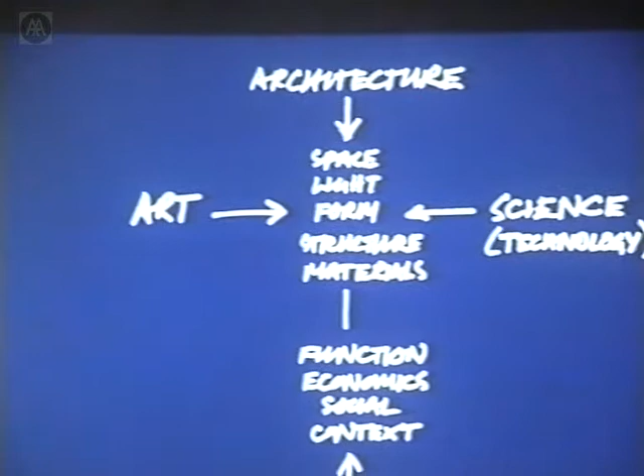Whilst the 20th century saw the start of the modern movement and the rapid development of technology, spectacular failures marred people's confidence in modernism. There was the destruction of our town centres for road improvement schemes. There were social problems caused by the housing programme, and there was general mistrust of architects and planners, which wasn't helped by the proliferation of badly designed buildings just after the war. And it made it much harder for later generations to do anything new.

But now attitudes have changed towards innovation and advanced technology, and there's a newfound confidence in design. At the same time, the boundaries between art and science have been blurred. Many artists have moved from the confines of traditional materials to new technology, and conceptual art has long since lost the need for an object. Science museums are now using artists to convey scientific principles.

New developments in material science and nanotechnology are coming into range, which will allow us to manipulate the structure of building materials to suit our needs. Computer programs are becoming ever more sophisticated and easier to use, so designers now have access to complex geometries which were previously beyond all but the serious mathematician. At the same time, engineers have 3D stress analysis programs which make it easy to determine the structural possibilities and therefore make complex buildings much easier to produce.

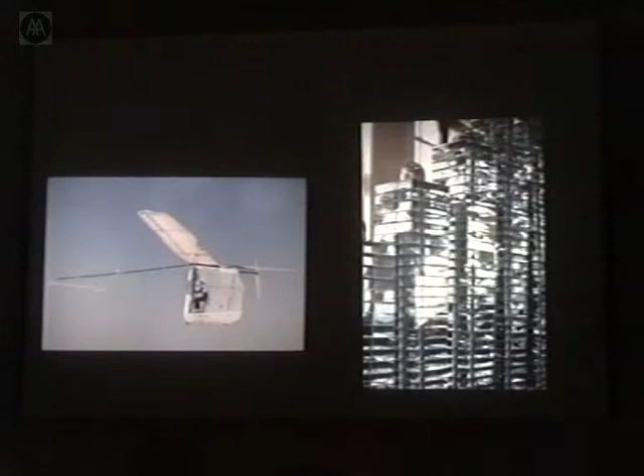Bryn came with the Gossamer Albatross and a sculpture by Danny Lane in glass. And we had this dialogue about using very fine cables and glass to try and move the technology forward, to try and make it as challenging as we can.

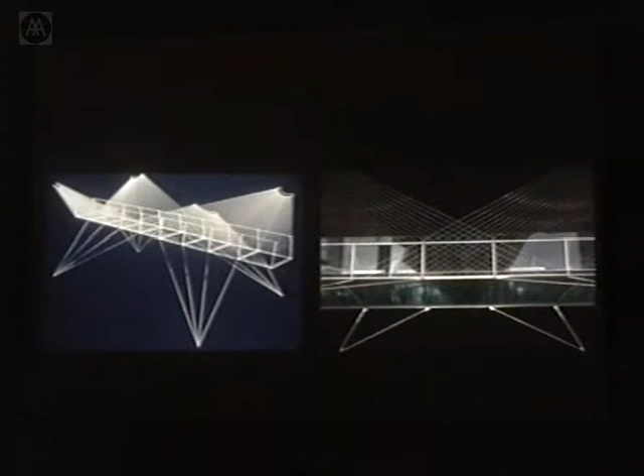This was the first sort of computer drawing of the scheme on the left. It's hopelessly out of scale. In fact, the cables are only 1.5 millimeters, about the size of a double bass guitar string. You can see on the slide on the right, that's the finished bridge. You can only see the cables because there's a black curtain down.

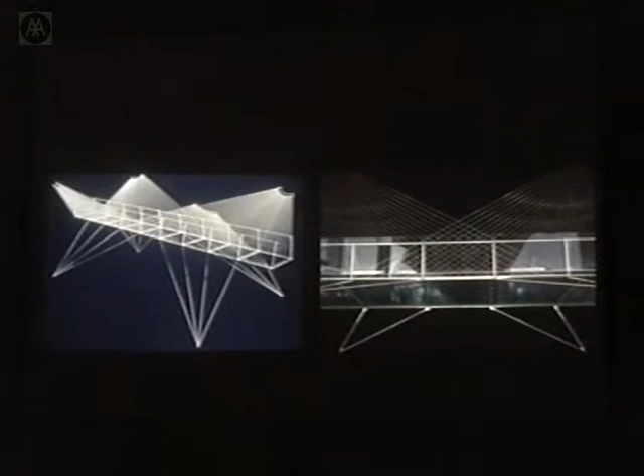This was on the day it opened, and they provided a black curtain which they unveiled, and we were able to get a photographer in to photograph it because the rest of the time the cables are invisible. And that was what we tried to achieve. We wanted it to be light, and we wanted to show that technology has moved forward.

The principle of this bridge is quite simple. We've used glass on its edge, and you walk on the top edge of the glass. So you've got planks of glass which are 20 mil thick, 100 mil high, and it's 1.8 meters wide. And it's used in a very similar way to the Danny Lane sculptures. You get this very interesting sort of chunkiness of the glass on the side. In fact, the weight of the glass helps the structure. It provides a download which helps the tension structure from movement.

The cables, you can see, are very, very fine. They're attached to this stainless steel member at the top, which has a kind of piano key to tension them up. And that in turn is connected to the main structure via stress gauges, which are connected up to computers. And each cable is in fact attached to the computer as well.

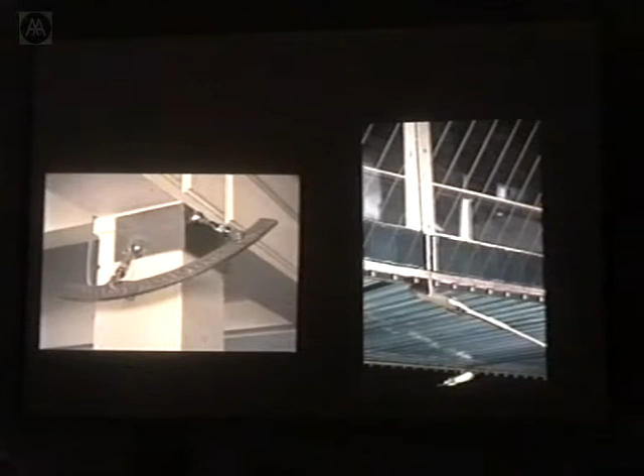These cables go from this steel crescent shape down, wrap round a little peg underneath the 25 mil channel underneath the glass, then underneath the deck and up the other side. So it's like a sort of tensegrity web in a way. And I'm not absolutely sure what the difference between tension and tensegrity is, but for me this is a tensegrity structure in the way that Buckminster Fuller talks about tensegrity structures.

You can see we've got bigger cables holding it down, and you can see people walking over the bridge, although it is a bit scary at first.

Now, on each project there are various aspects which we're interested in looking at. It's not always just the basic sort of structural elements, it's not pure architecture, it's all sorts of things. And in this instance, we explored the possibility of making it active rather than static. It seems to me that structures, and buildings for that matter, don't need to be just static. They can have more life to them.

And in this instance, we worked with the artist Ron Geesin, who wired the whole thing up. He put sensors underneath the glass deck. He connected all the cables up, as I mentioned, and he's got the stress gauge as well, and he's got video cameras on either side.

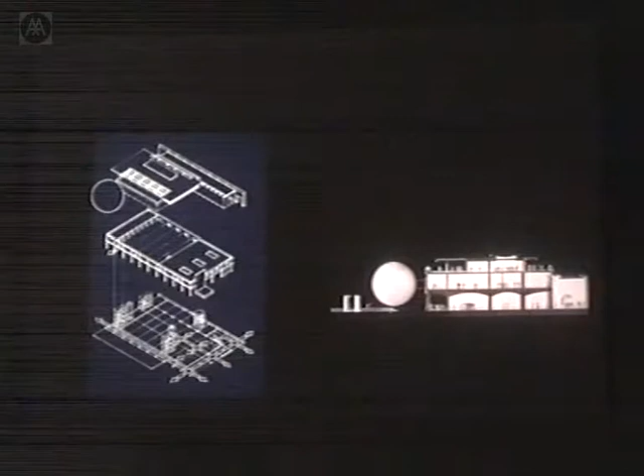On the ground floor, we've set the glazing back so that there's an arcade on three sides of the building. It gives it a little bit more depth, a bit of light and shade. And then on the top, the new deck is that concrete element. Let's see if this works. Here, which returns up to provide the balustrade, and that's the roof of the new floor above. This is the planetarium under construction, which is a steel structure.

The idea was that we would try to incorporate some intelligent glass systems, and to have multiple light sources with a sophisticated control system, so that you could play the building. It's important that the ground floor of the building and the pavement on the outside are exactly the same level.

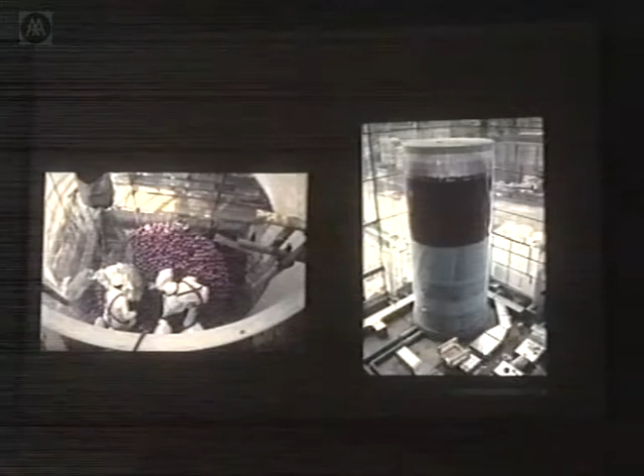In this building, we're working with Overton Partners. Greg Chickaha is the M&E consultant, and we set him a task. We needed cooling because it's a deep plan building, and there's a lot of technology inside. It's going to get heat spots, so it needed cooling, but we didn't want to have any toxic refrigerant.

He came up with a virtually untried idea of using eutectic salts, and these are the eutectic salts. They're housed in 100mm spheres, and there's a colour to the plastic that houses them. Now, the point about eutectic salts, and I'm not a great scientist myself, but apparently it changes state at 27 degrees centigrade, and it needs very little energy to give it this change of state.

So there is a latent heat, a latent energy which comes from the changing of state, and we use that latent heat as our power source. The medium is water, so these balls are all housed, we call them Greg's balls. They're all housed in a glass tank in the main gallery, in a vat of water, and that water is circulated to heat pumps throughout the building, which change it to hot or cold as required according to the temperature requirements of the day.

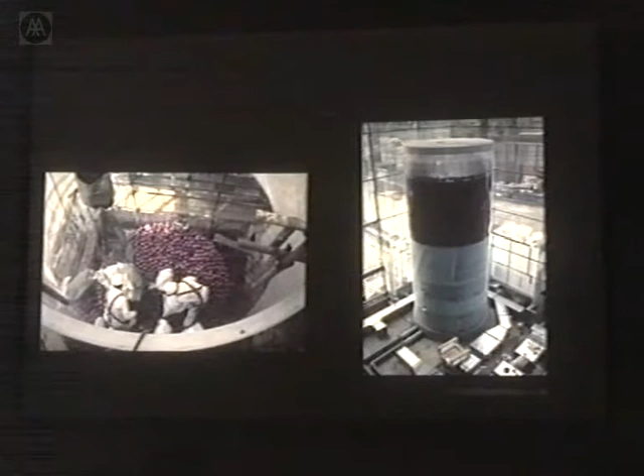We've also added thermochromic colouring to the balls, so that as they change temperature, they change colour, and you can see what's happening. It's kind of interesting, and it's working. But I have to admit, at the moment we've got a slight problem, because the water's actually sort of going a bit of a green colour, and we're having some teething problems on it. But it's certainly worth looking at new ways of solving old problems.

I should say that it isn't just the eutectics that deal with it. We also have a displacement ventilation system, for those who know what that is, using thermal wheels on the roof. So we're always using recycled power. And I also should say that when we need extra power in that tank, which is our boiler, we can top it up with off-peak electricity at night.

On the top floor, we have these big open-air spaces so that you can enjoy the views, but this is also a kind of education centre, so young children on sunny days are able to play outside, and a lot of the exhibits will be on these terraces on the upper level. We tried to get photovoltaic louvers here, but unfortunately it was beyond our budget and we couldn't get any sponsorship for it, so we've just got ordinary louvers, but they do move.

Now, moving on to a project. I don't usually do this, showing a project which isn't going to be built. It was a competition scheme for the Imperial War Museum of the North in Manchester, which was won by Daniel Libeskind. We came fairly close behind, I think, and one learns from competitions. It's an opportunity to experiment and try new things. In this instance, we were looking at the idea that a museum needs to have a strong identity, but maybe that identity should be able to change.

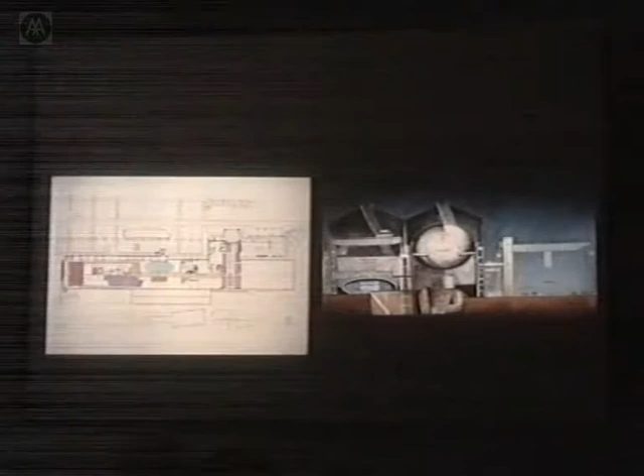Now, I'll show the plan on the left, because you can see that these are the pavilions scattered about the space, and you get to them by walking on bridges and walkways connected to the main structure. So you never actually touch the ground. You're treading through space very lightly. And as you go, you see the process plant, which is still largely there. And this will be kind of lit up, and there'll be sounds and quite a lot of drama. But each pavilion is to do with now or the future, whereas the building retains the elements of the past.

It's a very interesting project to be involved with, and you can see here a drawing of our proposal. The air pavilion is conceived as an airship hanging in the roof structure, and then the earth pavilion is actually down in the cellar with this kind of fractal roof, and that's the water pavilion and the fire pavilion beyond.

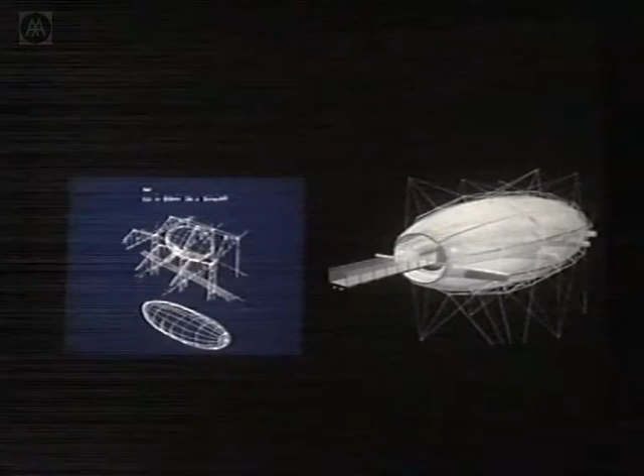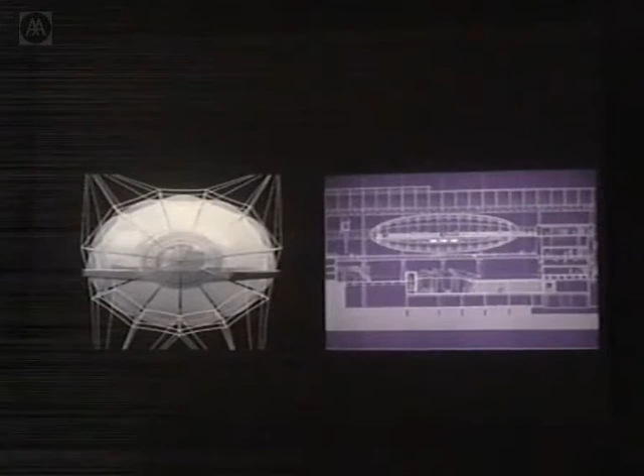Another view of the other end of this, and actually it's more dramatic than it shows here, because the ventilation of all these pavilions is using natural ventilation. So we've got two huge fans at the end which are drawing air in, and the air is expelled via kind of gills on the side here. You can see this is a structure which runs through the enclosure, and that provides the deck inside.

So as you go in, you enter on a steel platform which has got a series of holes in, and you're aware of the space around you. It's going to be a very interesting space. I can't exactly be sure that I know what it's going to be like inside, because I've never been inside an airship, but it is quite interesting, and you'll be able to see through the fabric. We're trying different fritting patterns to give it the right kind of depth to the fabric, so it doesn't look like a clear plastic bag.

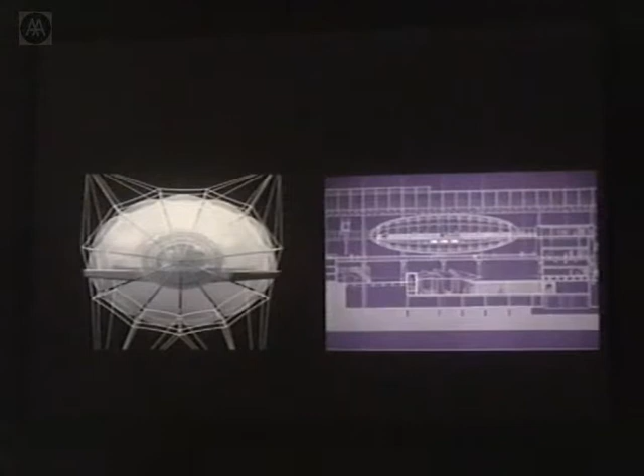On the right, you can see that the air pavilion is standing right up in the roof space above the earth pavilion, which has got a totally different sort of heavy structure below. Now I'm going to just talk a little bit about the water pavilion, because one of the things that I'm interested in is form. I suppose we all are as architects, but it's always difficult to find new forms. And for the water pavilion, I was very keen on having a sort of vessel. By that I mean the sort of stainless steel structures which you get in breweries or in dairies that carry liquids. But we wanted something different.

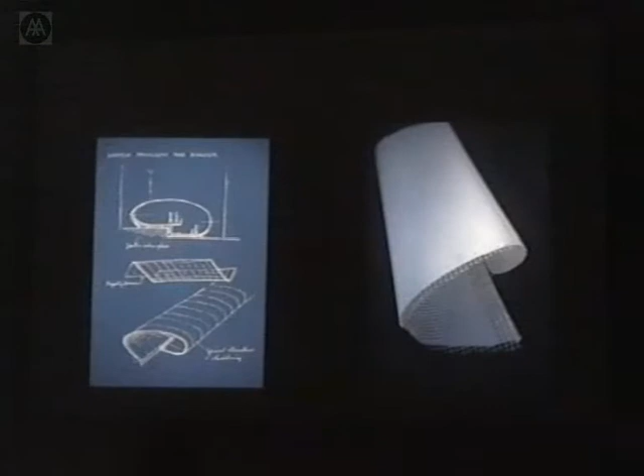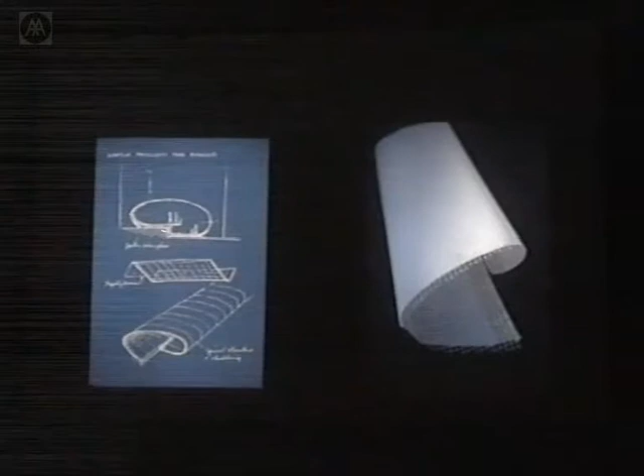And Will Alsop's always done all these structures before, so it's quite difficult to find something new. We were playing around with forms, using this steel mesh in our model workshop, just bending it around and pulling it. We got this rather interesting spiraling effect, which is very relevant to our particular site, because you can see here that the slab level changes. It's got about a 1.5 meter deep change in level right down the middle of it. So with this form, we were able to start on the upper level and go round to the lower level, thinking of it as a giant sort of spiral. This was a computer model of how one might create this spiral structure.

Sorry, I have to go back. Lost one, but

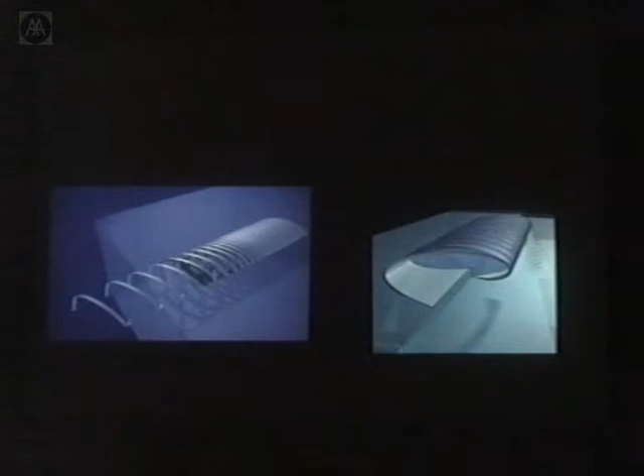it's not essential. But I can say that this one is also under construction, in the sense that we've been out to tender, we've got contractors on board, and the steel structure is unfortunately on an orthogonal grid because it was more economical, but it changes at the ends to a very lightweight tubular structure which is visible, and the outside is stainless steel in a sort of parallelogram shape. It's made of thin gauge stainless steel cut on the bias, and I think it's going to be very, very exciting.

But that building, as I say, is on site. Most of the building works are due for completion at the end of this year, and it'll be very interesting to see some of the results. Now, moving on to another project which we have in our office, which I've never shown before. It's a multiplex of 20 screens, including an IMAX, and we tried something different here, but it's using this spiral idea again. There was a reason for it, though: the site. This is a plan of the building on the right. The site was too tight to have all of the cinemas at one level. We couldn't even get it on 2 levels. He'd actually worked it out at 2.5 levels, and 2.5 levels are not very good from an economics point of view.

So we tried the idea of spiraling them around a central space. The thing about these multiplexes, they're all different size units, and we started by having a central space and just allowing them to tell us what size units they wanted. I mean, they kept changing from week to week, and I think they're still changing at the moment.

But using, this is a big one with about 500 seats, and this is a small one with about 120 seats. Now, by stacking these, the big ones just one on top of the other, and the smaller ones up to 3 on top of each other, and changing the levels, we get this spiral form which comes from the Nautilus. It also, because of the shape of them, you actually get a kind of Nautilus effect.

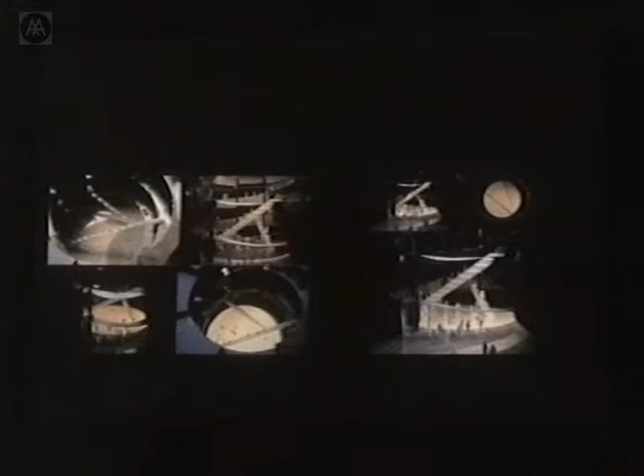So it was quite tricky getting this one through, but they're all very keen on it now, and it may well be the next sort of form of multiplex to come. I'm 90%, 99% certain this is going to be built this year.

Now, if you can imagine from a previous slide, you've got all these auditoria stacked on top of each other, and we found that the easiest way of creating some sort of form to it, and in fact the cheapest way of enclosing it, was to have a simple skin around the outside. But that skin would be very dull because there's no real need to have any windows in it, and it would be just a dead space.

So we counteracted that by this idea of having different layers of transparency in the skin. We've ended up with a polycarbonate cladding system on the angle, which is the same angle as the ramp, the 1 in 20. And each one of these has a different level of transparency. There's 6 different levels of transparency, going from completely clear at the bottom to completely opaque.

And we've painted the auditoria behind in bright colours. I mean, it's just a very simple, the first sketch actually, which was taking a spectrum and going round the building through the spectrum. So you see we've got roof lights above each of these spaces, and we'll have floodlighting at night, and that provides this level of colour which varies in intensity according to the level of transparency on the outside. It's kind of a simple idea, but I think it's going to be quite exciting.

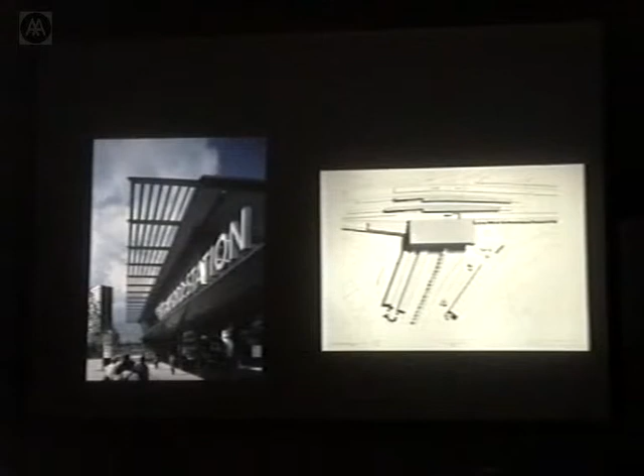This is the DLR, which comes in and stops at this station at the high level. This is the bus station, which exists and is a very nice fabric structure by Tony Hunt. And right through the middle of the site is the North London line. It goes through at ground level underneath all these lines here. And this is the Jubilee line platforms which stop at this point. And it was our job to try and tie them all together.

Now, you might ask, well, that's okay, how do you get to these high-level platforms? And the way we've done that is there was an existing tunnel here which connected up to what was the existing station at this point. We put a new tunnel in alongside here which does exactly the same. So there are stairs and lifts going to the platforms above. And that was the simplification of what was a very complicated brief.

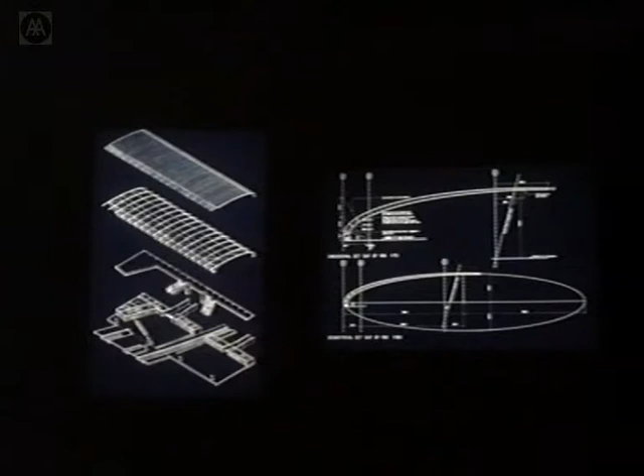When we won the competition, we had to transfer that into a piece of determinable geometry, and we did this by digitizing the sketch and overlaying various geometries, and it turned out to be this ellipse, which is an ellipse about the center of the structure. In the past, ellipses were very difficult to build, but now they're very easy. They're just as easy to draw and easy to construct now. So, we've got the structure, we've got the simple space.

The environment within it is very important in these stations, as you're well aware. One of the problems we could foresee was heat build-up, because this glass wall faces south. So we had to deal with that. I'm working with Loren Butt, who is a very talented environmental engineer. We set him the problem: we didn't want any plant, we didn't want any ducts. We'd like it to be sustainable. And he came up with the idea of using the structural void.

So what we've done here is we've peeled the soffit away to reveal the structure here, and put some grills at this point. And the hot air naturally rises and is drawn up the structural void. And this is solar powered because we've reduced the amount of insulation on the top of the roof, which is an aluminium upstanding seam roof. So when the sun comes out, it heats up the roof, and the heat draws the air through, which is helped by the fact that the structural zone is tapering from about 1.4 meters at this point to only 350 at this point. So it draws the air up like a thermal chimney.

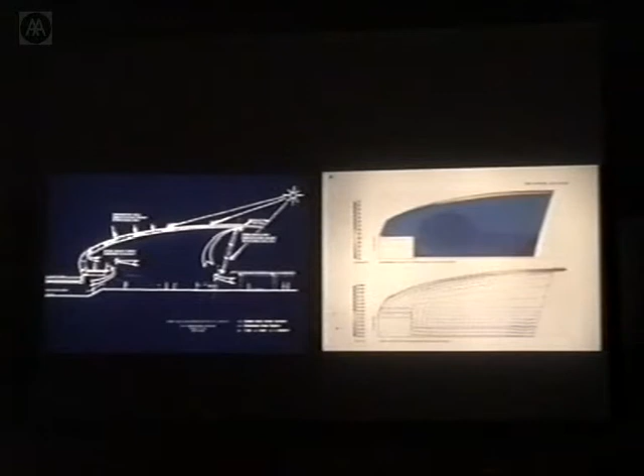Now I'd like to show you a little bit about the structure. Wilkinson Eyre architects have always been interested in structure. I can say that I've always been interested, and Jim, my partner, has always been interested, and we tend to attract people who are interested in structures. This is a very simple structure. It's a propped cantilever.

These ribs, steel ribs, are fabricated. Actually, the fabricator used the same program as we use, so we were able to check that he was working to the same geometry as ourselves. I think soon we'll all be able to pass our drawings straight to the fabricators, and they can work from there, but at the moment they produce their own drawings.

These beams are bolted to the base, which I'll show you in a minute, and they rest onto a truss, which you can see here, which is quite a deep truss. It spans 30 meters across the railway lines, but it's deep because we wanted it to be deep, and we made it as lightweight as we could.

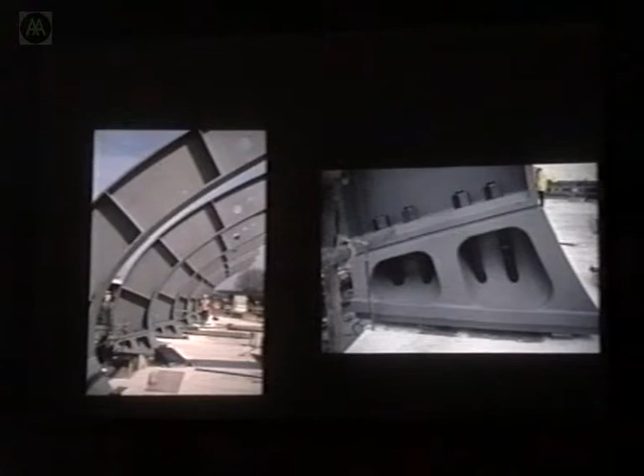Here the engineers are Hyder, a big firm of civil engineers, and we very much enjoyed working on the idea of making this structure understandable, really. We wanted the general public to be able to read it, to see how it works in the way that Victorian structures work.

You can see that these huge ribs have to be bolted down, and we do that via this cast steel base plate. Each one of these weighs 3.5 tons, and we were able to sculpt these because they're cast. We wanted you to be able to see these stretch bolts which go through the top flange, through this base plate, and they go through the concrete slab to a plate below, and they're tightened up. And all that is very visible.

And you can see in the finished building the structure is revealed. A very simple glazing system, curved glass, allows you to see it from both sides, and you can very easily see what's happening. You can see these stiffening flanges, everything.

The space, though, we didn't want it to be a heavy space, we wanted it to be light. And it's a very difficult thing to determine what lightness is. Lightness can be achieved with heavy structures. And in this instance, we wanted the space to be filled with light. It's one of the feelings that I always have about Paddington Station. I love Paddington Station, the structure, but I find it very depressing inside.

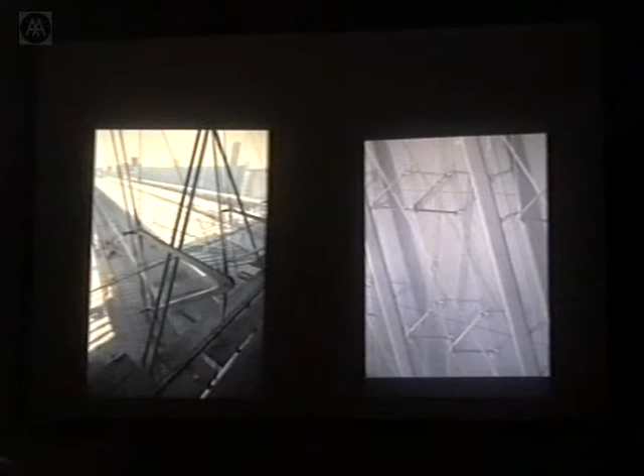On the south wall, the glazing's on an angle of 11 degrees. There's no secret to the 11 degrees, it just looked good on the drawings. And the glazing is supported off the truss that I mentioned with a tension system. It's no rocket science here, but it is quite complicated, and one shouldn't underestimate the complexity of building these structures.

We only got this built by blackmailing the contractor and getting Arup facade engineering to back our case, because the contractor at the last minute said it couldn't be built. We knew it could be built, and it was built exactly as we drew it in the end. These aren't castings, these are huge. That distance is 1.5 meters, to give you an idea.

No, 1.2 meters, sorry. And these are cut out of stainless steel. They look light, but you couldn't pick one of those up. They're very heavy, in fact. But it gives this feeling of lightness, and there's been a lot of talk about lightness recently, and I'm always interested in that, because I think there is a kind of elegance which one should strive for, which I strive for. And it's particularly good when it's counterbalanced by a bit of weight.

In this case, the weight comes from the rib structure on the other end, and the supporting structure for the truss here, which is in precast concrete columns. These are kind of, well, they're almost Nervi-like in a way. They're very sculptural, but they do take the forces, which is a big movement joint at the top, and they're supposed to look good as well.

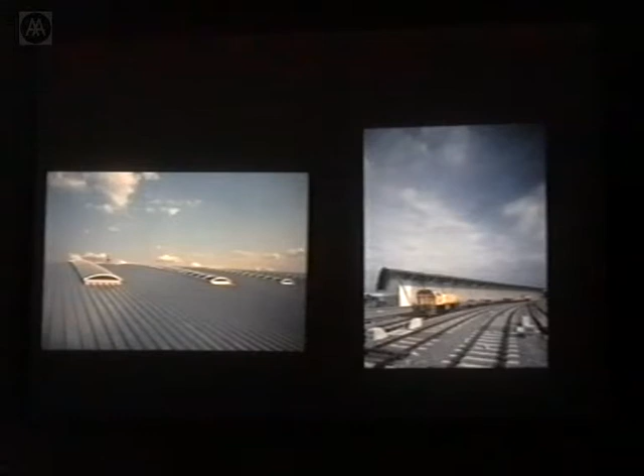And each one of these, so I'm losing battery I think, each one of these is a kind of zipping process. It's a tray which is zipped to the next one, so that allows thermal movement here, and it doesn't leak, which is good, because most big buildings do leak.

And the control building, it's a teardrop shape because that was the only bit of site we had left, which is between the tracks. And it's a totally different kind of building. It needed this circular control room, with as wide a view as it could have. And we've made the structure here an in situ concrete structure. So I do firmly believe that you shouldn't force these things. You have to use the appropriate materials and structure for the brief.

Now moving on to another one of the buildings you may have seen recently, for James Dyson, a vacuum cleaner manufacturer and designer. Interesting client to have. We first won this job for a building on a different site, which was going to be 2,500 square meters, quite small, growing to 7,500 square meters. But by the time we'd got planning consent, it was too small.

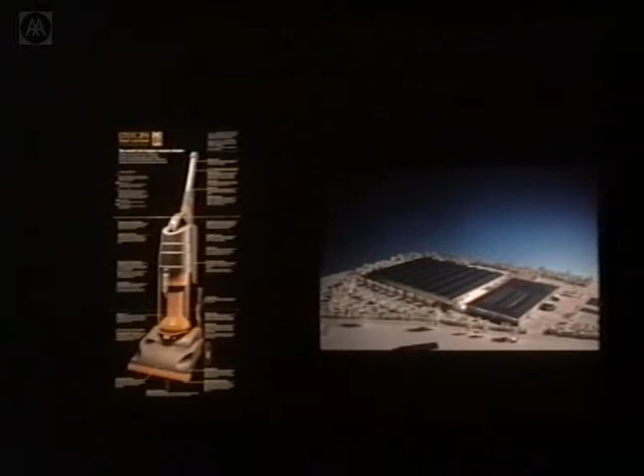He needed much more. And he was able to buy this building here, which was already 7,500 square meters. And it had a site next door, and he asked us to get him into the building, which was a sort of 2-month process of refitting it, to extend the existing building, making it up to 10,000 square meters, and to get planning consent for as much accommodation alongside as we could. This is the finished building.

We should just go back, sorry, just to explain. I'm sorry to do this.

Right. It's difficult. There was a different headroom requirement for the new building. For various reasons, we wanted to separate it from the existing building. So we did that and used the space between as this kind of recreation area, but also as the entrance. So everybody arriving at the building goes through a pavilion in between the two buildings and then can go into the other two buildings. And because security is very important here, they don't get access to the main spaces.

We sold this huge building, which is 250,000 square feet, 25,000 square meters, to the planners on the basis of this roof above. It's a floating roof above the trees. They thought they were going to get an ugly industrial building, and they thought this was an improvement on that. But from James's point of view, it is still just a shed. It had to be costed at a base price of £30 a square foot, which is what people work on. So it's an economical building.

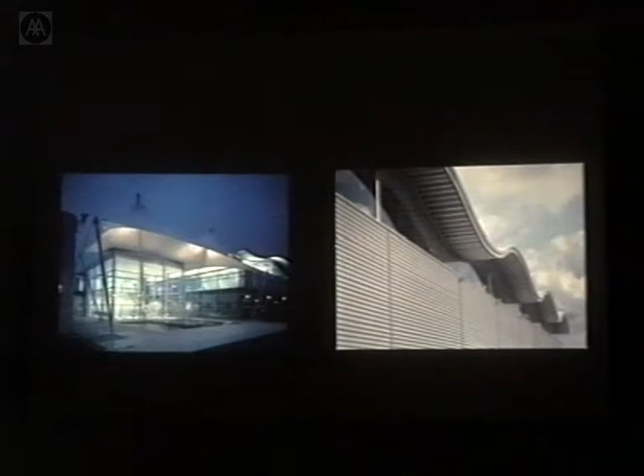Right, the entrance. We were allowed to spend a little bit more money here, and we provided this crisp glass box. It's a double cube, 9 meters by 9 meters by 18 meters, and it's a kind of receptacle to collect people. There's also an opportunity there to display the wares, so it's like a museum inside, and it has to be light and in his terms kind of high tech, because he wanted to have something to relate the vacuum cleaners, which are sort of latest technology, with.

But he also wanted it to be impressive for corporate clients, and we got into the usual old thing of putting a bit of water in front. In this instance, we used a reflecting pool, which is coloured purple, because he likes the colour purple, and it's the colour of his early vacuum cleaners. You enter the building on a glass bridge over this water into this glass space, underneath a canopy by Tony Hunt. And there's a light sculpture here by my wife Diana.

Nepotism reigns, but actually Diana was appointed by James without referring to me. But he wanted a light sculpture which sort of brought this water to life. And you can see here what it is, a series of what Diana calls light reeds. They're acrylic rods, 2.3 meters high, set into a bed of granite. And they're attached to a fibre optic lighting system. The light boxes are under the slab of the building, and they wave around just like reeds, in fact, or like long grass in the water.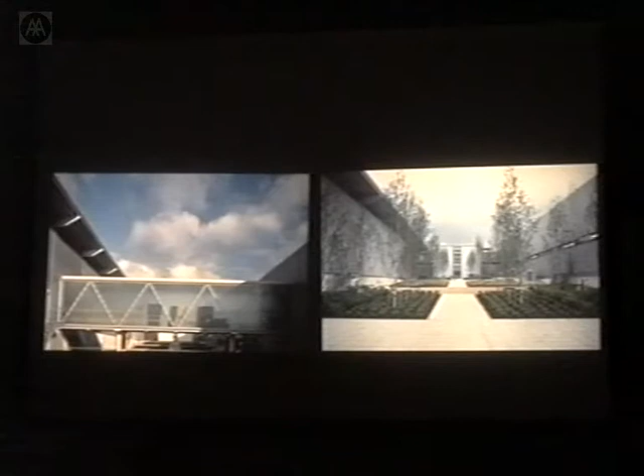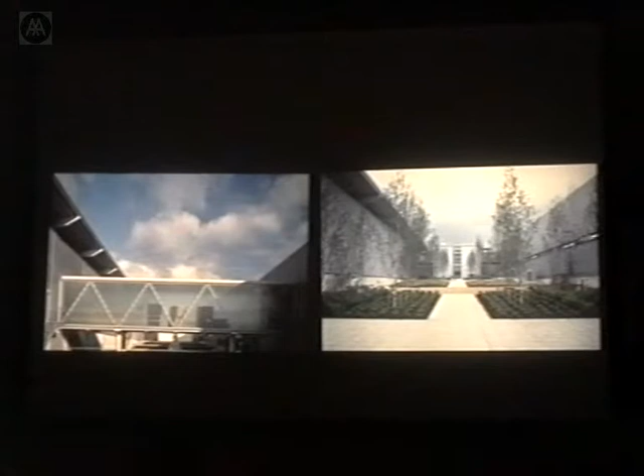Now, the space between, this is still an early photograph of the landscaping. It's kind of regimented, but there are a series of courtyards which people use, and another sculptor, Peter Burke, is working on a series of 40 sculptures that go in. There are people standing around in the space. And this is a forklift truck bridge, which links the two buildings, and there's also a conveyor line, so you can see the products going across the bridge.

The sort of last view of the front of the building with its glass wall, and the back, which has got all the guts, all the loading bays, and the same sort of roof, and very simple materials.

I'm going to move on to a few bridges. Canary Wharf Bridge, which is no longer, unfortunately, but I have to explain a little bit, if you can bear with me, of why it's this S shape. It was a competition held by the London Docklands, in their heyday, or just as they were leaving, in fact. They needed to provide some infrastructure which wasn't put in when it should have been at the beginning.

You've got this quite a big span of water. This is South Dock and Heron Quays. And the only way of getting across is on the DLR or going on a long route round. They wanted to be able to cross from the Canary Wharf areas down to South Quays, but unfortunately this is the building site for the Canary Wharf JLE station. So the brief was quite complex.

It required going from this side to this side with a bridge which could then be dismantled and re-erected on the line of the Canary Wharf once this station was finished, and also to allow for this dock to be expanded here, so for the next phase of development into the water.

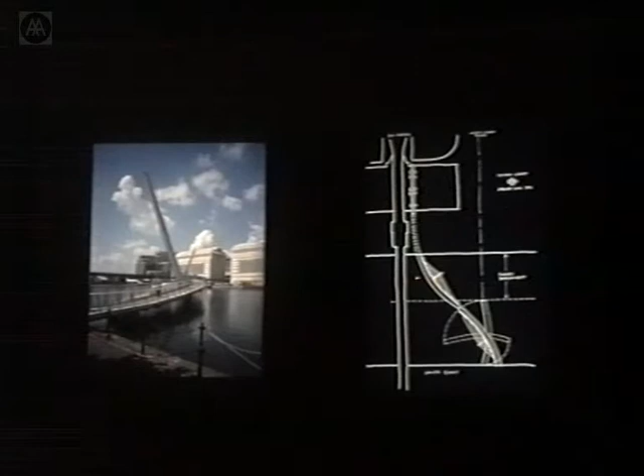Our scheme, or I should say it's Jim's scheme, because it was a very clever idea he came up with, was to have these two segments of structure around a pivot mechanism. One of them opens to allow boats through. This was a requirement, and because it rotates, it can realign to a new position in the future if required,

and in fact this is required, and it is about to be realigned on this line of the tower. Then this part of the bridge can be dismantled and re-erected alongside, so you get two bridges for the price of one, which was the kind of thing that wins competitions, and it was built.

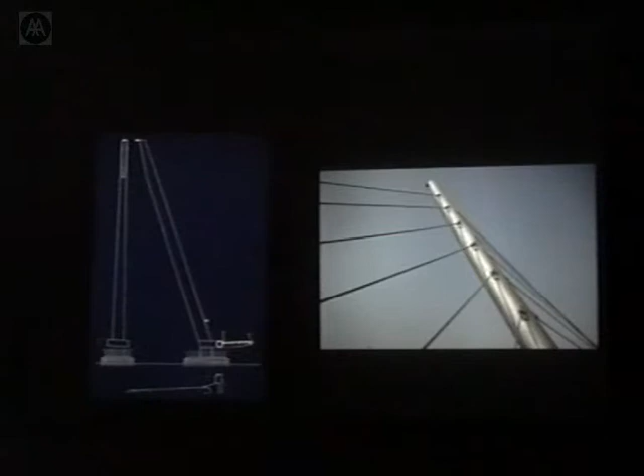Now, when we talk about bridges in our office, we talk about sculptures, because we see bridges as being opportunities for sculpture. And in this instance, the structure of the bridge is a 900 diameter tube supported by cables from a mast which is 35 meters high. The mast we wanted to look interesting, so it tapers from about 1 meter at the base up to the top, but it's also a kind of elliptical shape, which is very difficult to construct.

This is the engineer, John Cutlack of Jan Bobrowski. He's not that tall, but this is how we started. It's a 1.6 meter diameter tube, which they roll in 30mm plate. They then cut a slice out of each side, and you get these two bits and weld it together, and you can get this tapering elliptical shape.

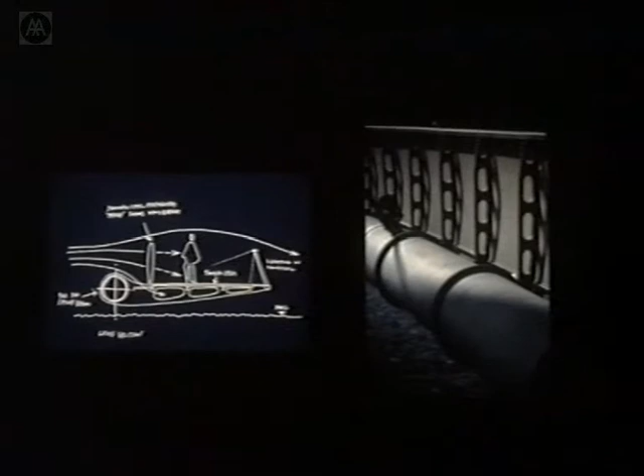Now, this is a drawing just showing how the structure works with this big 900 diameter spine beam, which has these brackets which support the deck. It's a timber deck. And to stop the wind, we worked on this idea of a stainless steel hedge. It's a perforated stainless steel sheet on a structure, and it does seem to reduce the wind load in the same way that a hedge does when you walk along the edge of a field.

Just a little word about lighting, which is obviously very important these days. It's no good designing a beautiful structure unless you can light it at night.

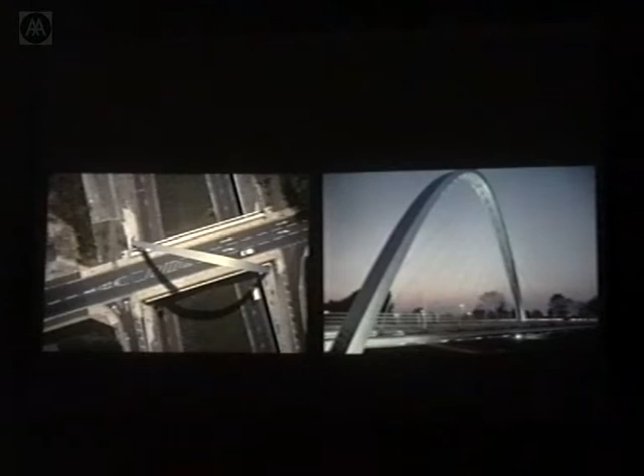As a result of that competition, which we won, we were asked by Naeem Hussain of Arup's bridge team to join him on the next bridge competition, which was for a road bridge up at Hulme in Manchester. And the brief for this, the idea of this bridge, was to celebrate the regeneration of Hulme, which is going on alongside it. It used to be a no-go area.

We thought long and hard about what would be the best kind of bridge to do this, and we came up with the idea that it had to be an arch, because an arch somehow has this kind of power. When you enter it, you know that you're going somewhere. It's like a gateway. And the problem with an arch is you can only go through in one direction. So we put the arch on the diagonal, which means that you can cross it in all four directions, and it gives an interesting structural problem.

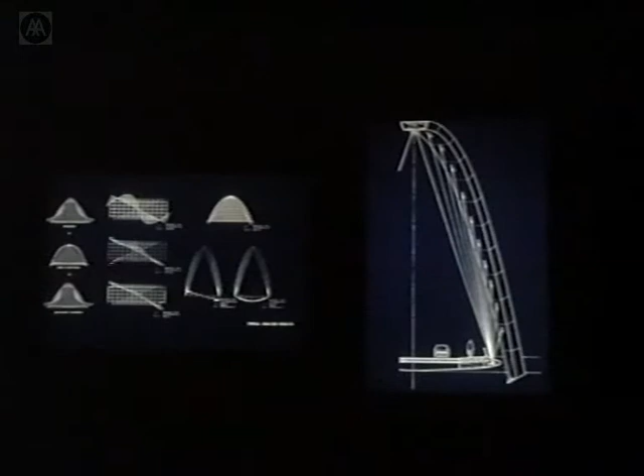In fact, Naeem Hussain, who's from Pakistan, really blanched when we first showed the idea of the arch on the diagonal, but he went away and did this quick stress analysis, which I talked about earlier, overnight, and came back saying that it was okay. The only restriction was that the arch was going to have to be very flat at the top so as to take out the torsional effect. Actually, it's at the third point for the engineers in the audience. I can see Hanif Kara up there.

But when quizzed on this, because we didn't want to have too heavy an arch, because we wanted to win the competition: did it have to be so big at the base? And he said, no, in fact, quite the opposite. It would be better if it was narrow and deep at the base and flat and shallow at the top. So we said, fine, that's it.

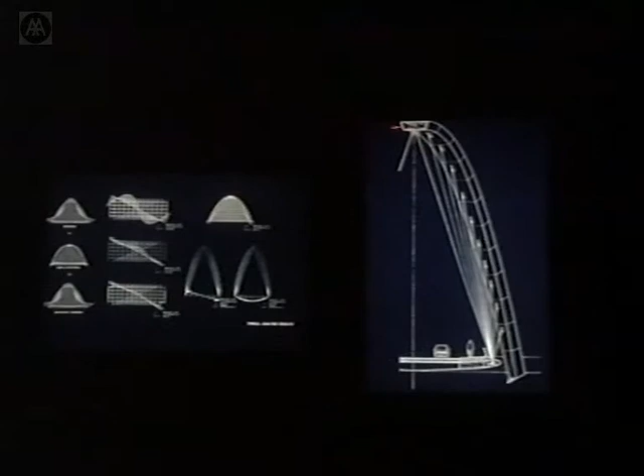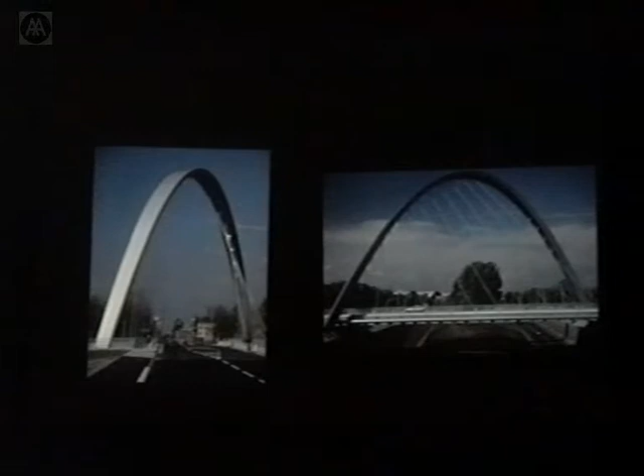And so we have this constantly changing section, which wouldn't have been possible probably until computerized cutting. It would have been too expensive. But Watson Steel were able to produce this box section with every plate being different, using their computerized pattern cutting system at a very economical price. So this bridge was built for the budget price of £1.5 million.

It was good when it opened. This was the fireworks, because we had Bobby Charlton and the whole of Manchester United there, and it was a very exciting sort of opening for the bridge.

Getting near the end now. Butterfly Bridge in Bedford, another bridge competition, which was a third bridge competition, and we won that as well. So we had rather a good run. Again, this was with Jan Bobrowski and Partners, John Cutlack. It's a very simple bridge. It's a kind of sculpture in a park. It's not a long span, 30 metres, and it's a footbridge.

And the idea was originally that it should be a cable net with the deck supported off it, but apparently it wasn't structurally possible. So we ended up with this system of two inclined arches supporting the deck, a deck structure from the balustrade system. It's quite light and quite elegant.

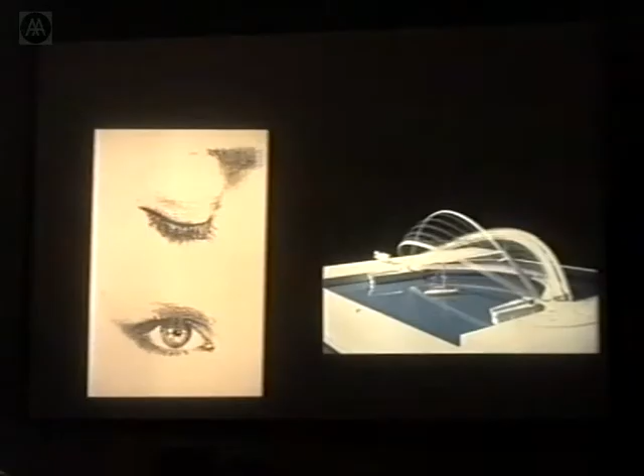We've used this wire structure, I can't think of the name of it, as the balustrading system, and you can see that the engineers had fun with all the connections. In this instance, it's Flint and Neill who were the engineers.

And just the last project I'd like to show you, you've been very good, I've been rabbiting on for a long time, is our bridge at Gateshead, or Newcastle, you could say. In fact, it's a bridge sponsored by Gateshead to connect their quayside to the very successful Newcastle quayside. This bridge has been called the eyelid bridge because it's an opening bridge, but it opens on a horizontal pivot mechanism.

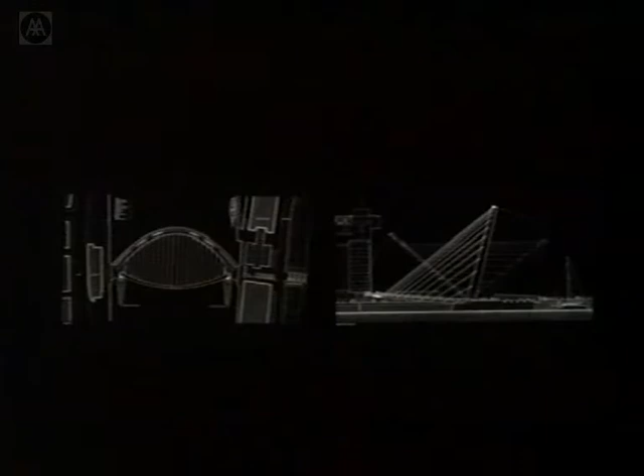To look at the drawings, it's two arches, one in plan, which is the deck which you walk on, and one in section, which is the arch which supports the other deck, with cables. And these two arches are connected at the base, and there's a hydraulic mechanism which helps it to rotate. And you can see here that the whole structure, which is like a cat's cradle, I suppose, revolves and opens to allow tall ships through.

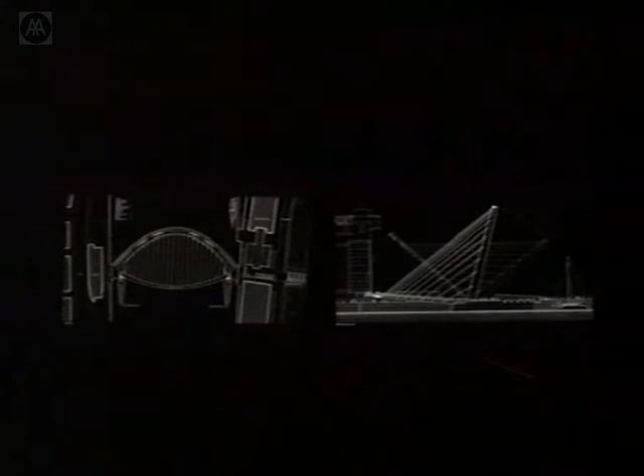There's very few occasions where ships need to go through here because they can't go any further up the river, but they do have regattas and they have tall ships, so it was important for it to be openable. And I'm going to leave you with these two images which were produced for the competition at the time of the competition, and I'm absolutely sure that the bridge will look just like this, and it will be, as far as we're concerned, a very exciting addition to the skyline in Newcastle.

And I'd like to just sort of try and wrap it up by connecting a few strands together, really. The art and science. Well, there is a connection, and architecture seems to be one of the areas where the two come together. If you think of science as technology, we can't do without technology in architecture. But there has to be more to it than that. There has to be this other element which provides the depth and the uplifting qualities to architecture, and I call this art. So that's where the connection between art and science comes in architecture.

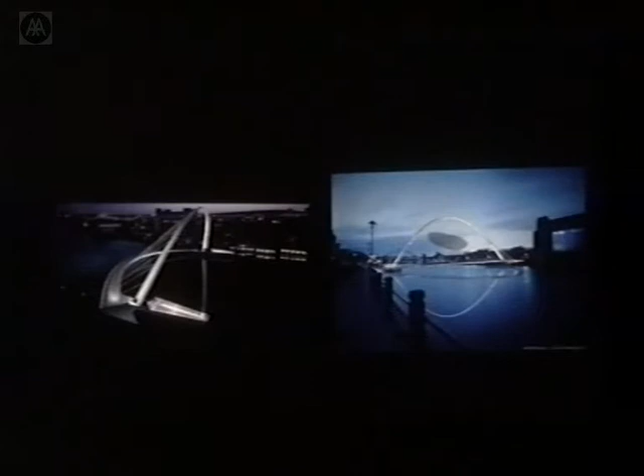Thank you very much. Great, thank you. I'm sure before you rush off, there are going to be one or two questions, maybe. Sure. Chris? Maybe while you settle down, one quick thing.

One of the things that you referred to was this moment when you were doing the drawing, and you said the contractors didn't think that it could be built, and you, by just doing the drawing, were very sure that it could be built, and it was built as per the drawing. In a way, I think this seems like a very interesting thing, that the contractor who's very familiar with construction doesn't trust the drawing, and you, by just doing the drawing, think that you can build it. I'm sure there's more involved in it, but what do you think about this sort of drawing, building, and the sense of knowing that something could be realizable by drawing?

Well, we all know that architects are arrogant people, and there is a kind of benefit from this arrogance in a way, although you have to be able to back it up. I think that you have to have a certain confidence in what you're doing. Also, I think it's fair to say that when you draw, you know what it's going to be like. I have never had a surprise yet, so I always say that I'll stop when I get surprised by what's built, because the buildings or the bridges always look like the drawings, and you can't fool yourself when you're drawing it. If it looks bad on the drawings, it's going to look bad when it's built.